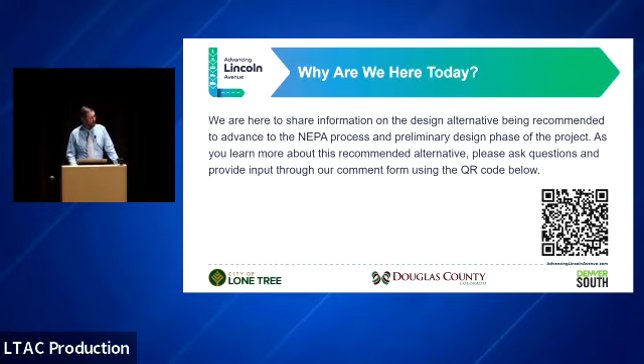There is a QR code you can see on the screen here, if you're online or on the screen. That QR code will let you put any comment in throughout the night. That'll allow us to look at them, and then during the Q&A session, we can provide responses to those as needed. So with that, I'm going to hand it off to the project manager for this project and the mobility manager for the city of Lone Tree, Dan Rain, who's going to take us from here.

Thank you, sir. Well, hey, good evening, everyone. Thank you for taking this journey and helping us advance Lincoln Avenue. So just to recap, why are we here? Because we're growing. We're adding more people to Douglas County and to Lone Tree. We're adding a lot more jobs, and there's a lot more travel needs. And we have spent a lot of time putting in the essential core ingredients, but we have to continue to grow and evolve and challenge ourselves and our partners to make these connections. And not just for today and tomorrow, but for the future too.

So it's great that we have very young stakeholders here tonight. So we saw them already using the QR code to fill out the survey.

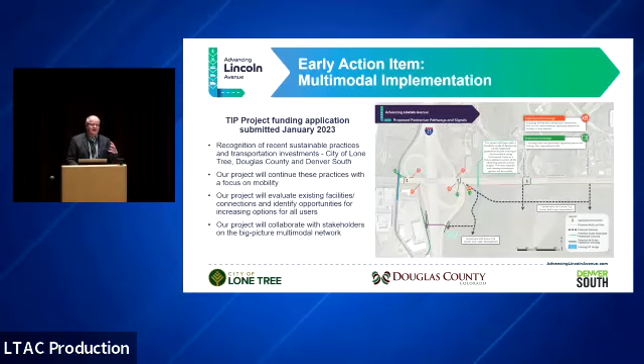Good evening, everybody. Thank you, Dan, for that nice introduction. I agree on the haircut wholeheartedly. What a great team to work with.

The city and the county, the CDOT folks, FHWA, DRCOG, everybody — we're pretty fortunate to be working with this excellent team of folks who are all extremely committed to enhancing and improving Lone Tree and the transportation connections, both vehicular and non, throughout Lone Tree. It's the backbone of everything, and to be able to work with folks that are that committed to advancing these kinds of projects, not just happy with where we are, but looking ahead, looking at the future, being prepared.

It's pretty exciting, and tonight we get to talk about a long-term solution to the Lincoln Avenue corridor, as well as some phasing opportunities to do in between. I'm just going to jump right into it.

Remind everybody a little bit of how we got to where we are. We started with 19 alternatives, 13 of them looking at the I-25 Lincoln interchange specifically, and another 6 at the Havana-Lincoln intersection. That's over 75 combined options if you start pairing everything up. Working with our technical committee of all the agencies over the last 15 to 18 months, getting into the weeds as much as we possibly can to make sure we're looking at every possible angle, we are down to one.

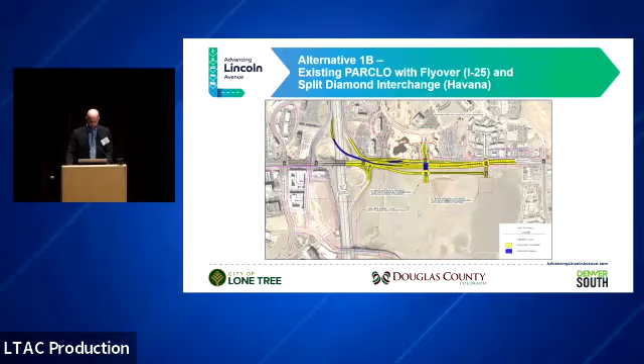All right, well let's just move on. So this is the first alternative of the 3 that we evaluated in great detail. I'm going to zoom in here a little bit to give us a closer look. This alternative is called Alternative 1, and it has a B next to it — I'll explain what that is here in a second.

This alternative really preserves the existing infrastructure of the I-25 interchange. That is huge from a constructability, implementation, and funding standpoint. Being able to enhance and improve for 2050 volumes while maintaining some of the existing infrastructure is a huge bonus of this alternative. We are adding to it, though.

What this alternative adds is a new ramp coming off I-25 southbound that will fly over I-25 and enter the center of Lincoln Avenue, the farthest left lane if you will, going eastbound. The idea with this ramp is to carry an extremely high volume of traffic that we were seeing showing up in the traffic models.

That is folks wanting to go east of this project corridor. We have a high volume of folks that want to head towards Parker — they might not all make it there, but that's where they're headed. What we saw was that by separating that movement from the local traffic, everybody gets to where they want to go a lot more efficiently. So this ramp allows that to happen.

It takes volume off of Lincoln through the interchange, puts it on its own ramp, and immediately you come in on the left and you can just cruise through. That allows the local folks who want to get to Havana or to Zenith Meridian to do so with more efficiency, because they're not competing with regional traffic.

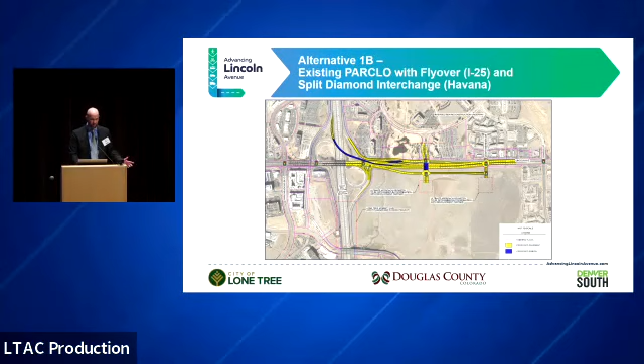Again, preserving the majority of the existing infrastructure at the interchange. Could we handle the volume at this intersection here? And what would it require us to do with other design elements as we move forward?

Well, what we learned is if you're on northbound I-25 taking the off-ramp to Lincoln and want to go east, we couldn't separate that traffic enough from the intersection to get them through efficiently. They get their own little flyover, and that dumps them again into the center of Lincoln Avenue. They can continue on as regional traffic.

This also has the collector distributor road on the east side. Again, that was the preferred way of moving forward for all of our partners on the technical and leadership committee.

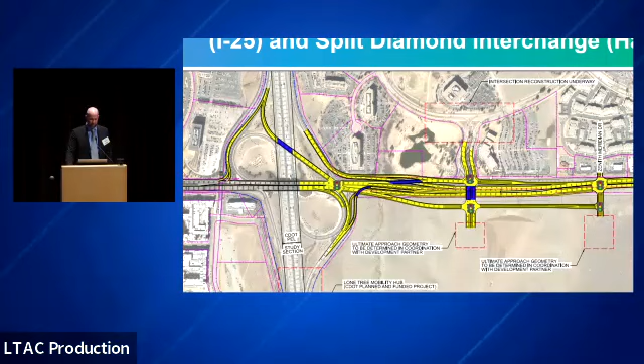So again, alternative 1, alternative 3 were kind of our comparisons, and here's the no action. I'll spend a quick second on no action simply to articulate that the no action in our project is not just doing nothing. Obviously, we have to add connections at Havana South and the Lone Tree City Center, and at Zenith South and the Lone Tree City Center. Those don't exist today, but there's obviously a plan for development to the south, so our no-build option includes those legs, tying into the master plan that the developer has.

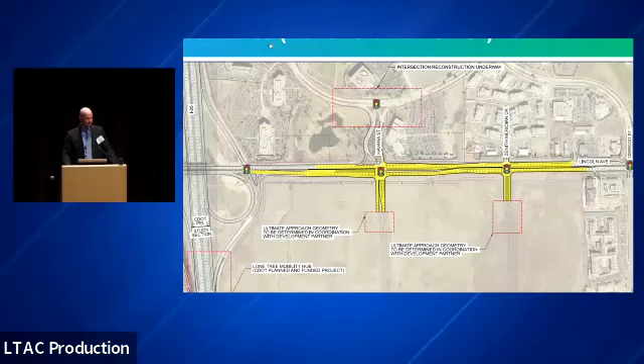In addition, this alternative includes a 3rd left turn lane from eastbound Lincoln to northbound Havana. That is on Douglas County's plan right now, something they want to do in the near future, potentially regardless of what alternative moves forward, as an interim maybe. The idea is the 2 left turn lanes that exist today do not function today, so that enhancement is going to be needed no matter what. Our no-build includes a couple options that are on the plans right now, and that's what we've been comparing these alternatives against. Again, alternative 2 performed worse in 2050 than this alternative, and therefore was removed from further consideration.

All right, recommendation is 1B. I've got another slide that I'll show you where we get into some more of the details on that. Alternative 1B best addresses our purpose and need for the project. Dan threw up the slide about why we're here, what problems we're trying to solve. Alternative 1B solves those problems the best. It's not the only way to do it, but it does it the best.

Specifically, best balancing regional mobility and local access. This has been a theme of ours since before we even had our first public meeting—how are we going to balance the folks that want to use this corridor and the interchange for regional movement versus those that want to use it for local access? The alternative we've developed, that the team's really pushed us on, does that the best of all the alternatives we looked at. So we're pretty happy with that.

The flyover at I-25—again, we're preserving the majority of the existing infrastructure. Adding that flyover to the interchange really provides us the highest capacity to handle future volumes. That is huge for us. Being able to separate that regional movement through this stretch, get them in the left lane on Lincoln, allow them to go through the corridor unimpeded, was huge in balancing and creating efficiency for those wanting to use the local access. And again, more conventional geometry, better meeting driver expectations, and easier to implement than alternative 3 that we were looking at before.

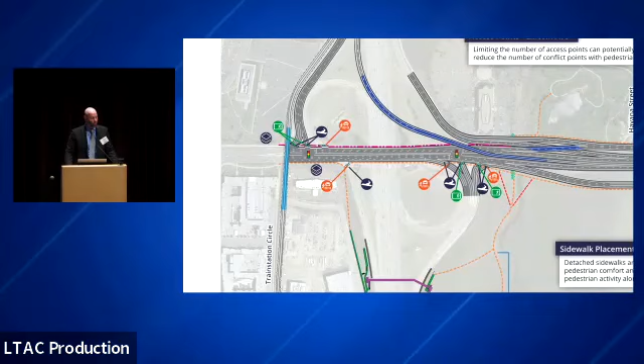I'll zoom in on a couple places here because it's pretty fun. We're looking at how to navigate pedestrians across I-25 on Lincoln Avenue. You don't see a lot of folks doing that today, for good reason—we don't have the infrastructure there yet to do that comfortably and safely. So we're going to focus on that at Lincoln, but we're also going to focus on connecting off system, if you will.

We have CDOT partners here today, and they have a table in the back to talk about the Mobility Hub, the Lone Tree Mobility Hub. There's a partnership between the city and the state to put a mobility center here just south. Connecting folks to that from the Lincoln corridor is a huge part of this multimodal network. We really are trying to connect everybody through a network so you can get anywhere you want to go in your mode of choice, safely and comfortably.

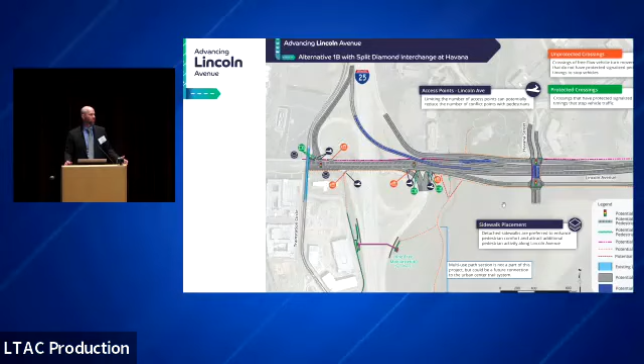On Lincoln, if you're one of those folks that likes to commute on their bike and is totally comfortable riding six inches from traffic, you can do that. If that is not you, and you want a more comfortable ride that takes a couple minutes longer but you enjoy it, you can get off that system and head down to the Lone Tree Mobility Hub, cross I-25 that way—just a little more comfortable route for those who choose that. And of course, connecting this through to the new grade separated interchange at Havana, and all the way off to Zenith, connecting into the existing infrastructure to the east.

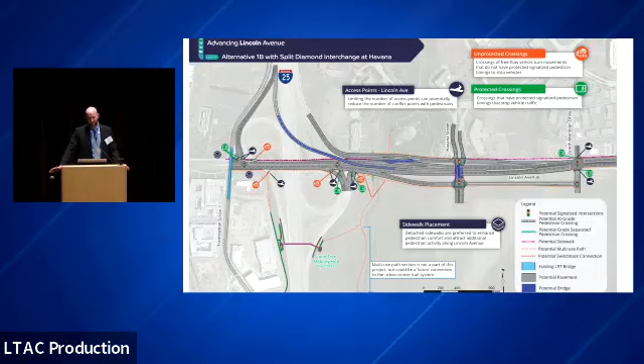We're going to say it all the time, until the end of this job, we'll be saying this: the mobility, connectivity, and access aspect of this project has been forefront and will continue to be forefront. That's why the early action of applying for funding was all about the mobility and multimodal aspect of this job.

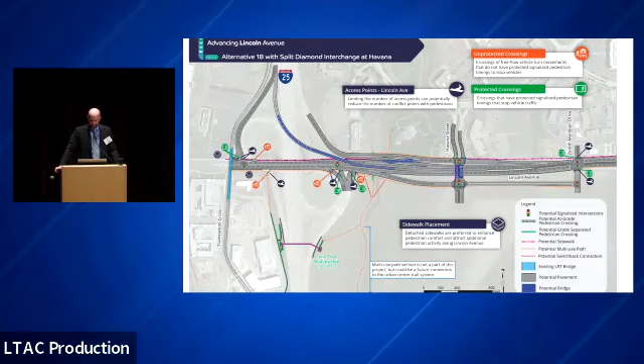So what's next? That's an awesome conversation to be having. For a while we've been focusing on coming up with the best solution, and now that we believe we're there, we can start looking ahead at what's next. We are not going to construction tomorrow, sorry to say—I know a lot of folks would like us to do that. There's a few different reasons why. We are not done making Alternative 1B the best alternative it can be. We have a lot of work left to do.

We're going to get into preliminary design. Mark DeVos and our design team, along with the engineers at the city and county and other agencies, are chomping at the bit to get a hold of this thing and start designing it—really finding out the horizontal and vertical geometry, where this is going to go. So we're calling out design refinements, things we want to consider as we go into that preliminary design, as we continue to advance and make sure we're optimizing the efficiency of this alternative as we go. So we're not done—we're going to continue to make this the best alternative we can.

While we're doing that, we're going to execute the NEPA process that Justin and Dan talked about earlier. This is where we take the alternative and look at natural, socioeconomic, and built environment impacts it could have. We look at ways to avoid and minimize those impacts, and ways to mitigate them if necessary. It's a really critical federal process we must complete, as Justin said, in order to be attractive for future funding when it comes to construction, and also to make sure we're not doing anything that would adversely impact the environment or the folks in this area, because that's not what we want to do. We want to build something that works for the traffic, and also avoids and minimizes as many impacts as possible. So this is our opportunity to do that.

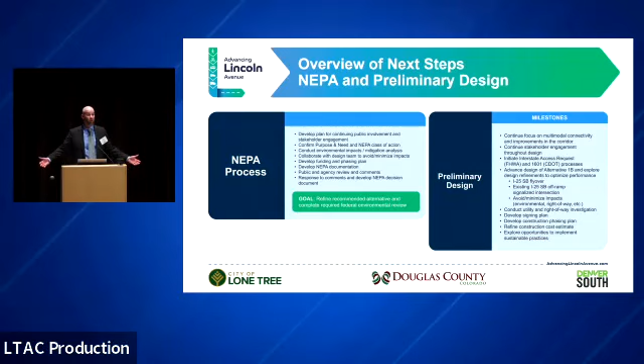We talked about that at the last project meeting. That is impressive and extremely welcome, because we don't have to pause. We can move forward with the momentum that we have and roll right into final design and take that next step in getting something built to help the traveling public here.

So that is our goal for 24-25, and then we will be ready, pending funding, to start a phased implementation of this project in potentially 2026. So phasing, Dan talked earlier about multimodal being an early action item. We can get that infrastructure in.

We'll know what the ultimate layout looks like, and we can start building according to that. But even taking Alternative 1B and looking at ways to phase implementation of that, if we don't get all the money day one for construction, how can we take advantage of that? So in the preliminary design and NEPA phase we're about to embark on, we get a chance to look at a funding and a phasing plan in that process. So we'll get an idea of what the funding picture looks like, and we'll get an idea of how Alternative 1B can be phased in its implementation, and it can be.

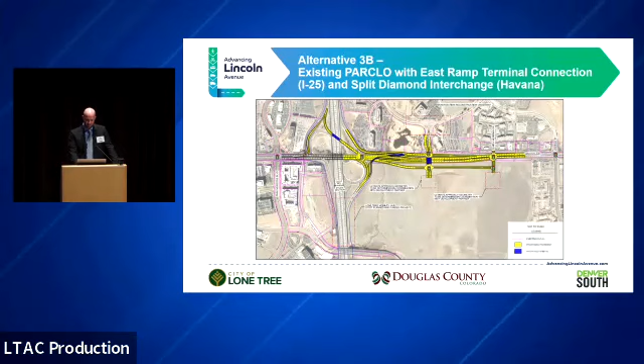Art Griffith would like to make a statement from Douglas County. John, could you go back to the SPUI that we eliminated? This was an alternative Douglas County thought we were going to move forward with in the 2008 study. But in this new configuration, you eliminate the eastbound to northbound loop ramp, which John stated earlier is fatally flawed, because there's so much east-west traffic going to and from further west of Lone Tree. I just thought I'd add that.

Art, thank you again. Diving into this a bit more, there just isn't enough capacity to handle that large movement of folks wanting to access I-25 from Lincoln going northbound. So consolidating two entrances into one just does not work here. We looked at it a bunch of different ways, different tweaks to the design, to see if we could make it work, and it just wasn't in the cards for this one.

Other comments or questions from folks in the room? Okay, Anna Marie, this may be the last call for folks online. Did anybody chime in with a question while we were addressing the last one? Okay, we have one.

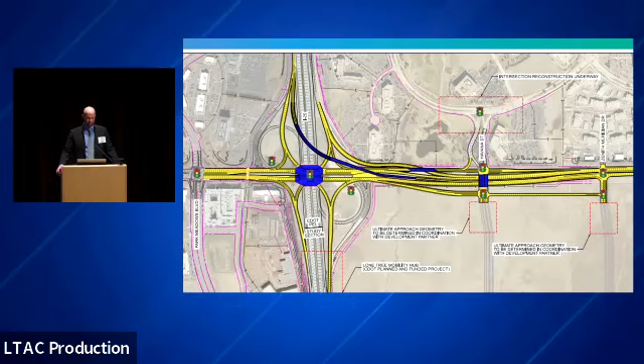Any thoughts about mitigating traffic congestion northbound on I-25 at Ridgegate and Lincoln during and after construction? Northbound can back up even to Castle Pines.

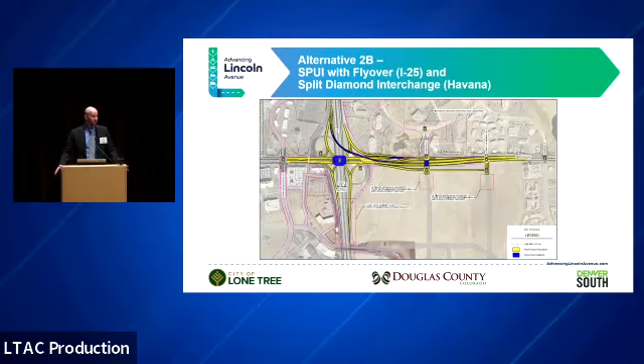Excellent point, I wondered if we would get this question today. One thing you've hopefully noticed as we've looked at the alternatives is that we are not making improvements to I-25 with this project. That's really important to understand. It's not that no more traffic is coming to I-25 — there is, the 2050 model shows that. So the question is excellent: how are we going to handle that?

CDOT and FHWA have current plans in action that address I-25. We are continuing to work with those agencies to make sure nothing we do here precludes any of those studies or anything that comes out of them from moving forward. If nothing were done on I-25 and we just move forward with Alternative 2B, it's better — it's better than no action.

It's enhanced greatly if we can get some improvements to I-25, but that is outside the scope of this particular study, outside the jurisdiction of Lone Tree, Douglas County, and the other locals in the area. Not that we won't be closely working with CDOT and FHWA as they advance their studies and look at implementing things on I-25, it's just not in the scope of this particular study. So we look forward to working with those partners.

That's the big picture. As far as during construction, wonderful question, we are not there yet. As we get through preliminary design and understand potential phasing of construction, we will be able to come up with phasing plans that accommodate movement during construction. That will come in the next few years as we continue to study those phases and what's possible here. You can trust that will be a major part of the conversation as we move forward, especially in final design, understanding that folks don't stop traveling when we go under construction, and we have to continue accommodating movement throughout.

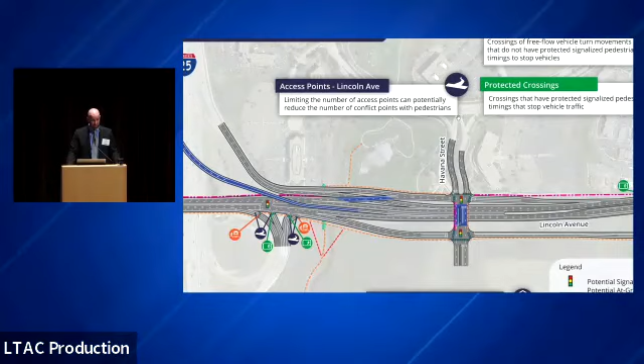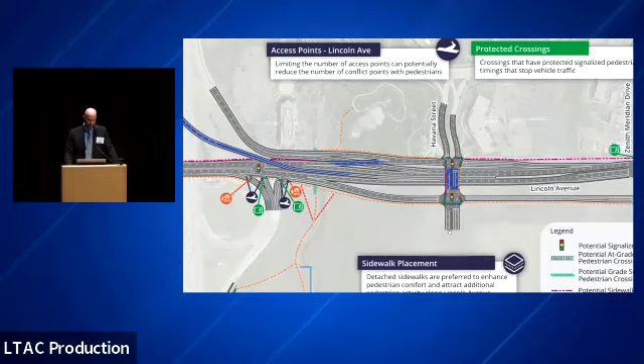I believe what we're talking about is the new construction that just took place here at Havana and Meridian. That was a Douglas County project we worked closely with - they gave us the geometry of that design so we could include it as a baseline in our analysis. So everything we're doing here ties into that perfectly. Thank you to the county for allowing us to have that from the start. As far as connecting from that location into Lone Tree City Center, the grade separation of Havana over Lincoln allows that to take place. Today, if we were to not grade separate it, you'd go to that single intersection and continue south. Here, because of the volumes, we have a grade separation - Havana will go over Lincoln in this area and continue south into Lone Tree City Center. So absolutely, 100%, you can do that at Havana.

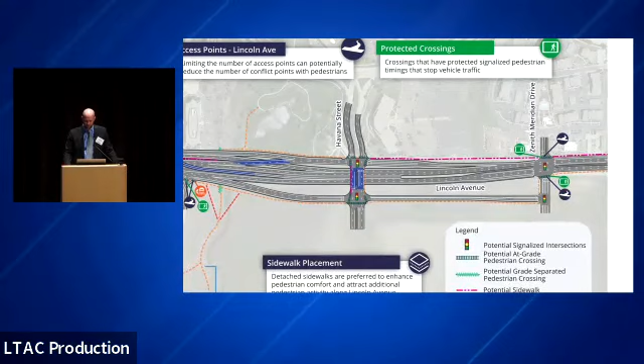You can also do that at Zenith, although it's a little harder to navigate on the north side. And then you have roads to the east as well at Oswego and Peoria that get you north and south too. So a lot of options here, but most definitely at Havana we can get folks north-south across Lincoln.

Was that the last question, Anna Marie, or did another one pop up? Are we getting people's thoughts moving? That's it. Okay, thank you. Any other questions from folks in the room?